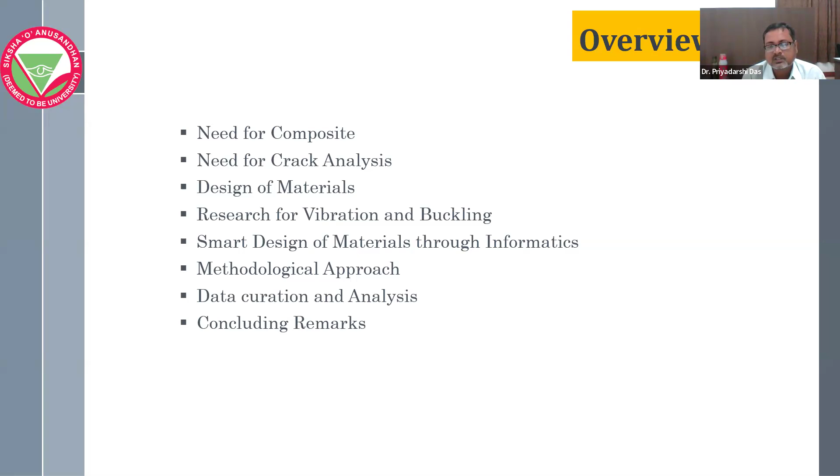So why do we need composite materials? Composite materials have been widely engaged in modern engineering due to their tailored structural properties, the inherent capability of combining two structures while maintaining their originality. That means two different materials are combined together to form a single material, where the individual materials do not lose their integrity. This enhances the performance of the material and also enhances its applicability, which significantly motivates the use of composites in widely engaged and applied engineering fields.

So what is the need for composite? It has improved tailored properties of high strength and stiffness, which essentially increases the stiffness-to-weight ratio and strength-to-weight ratio, reducing the weight of the structure, making it a lightweight structure without compromising its performance. That's why it is weight sensitive and cost effective, due to high strength-to-weight ratio.

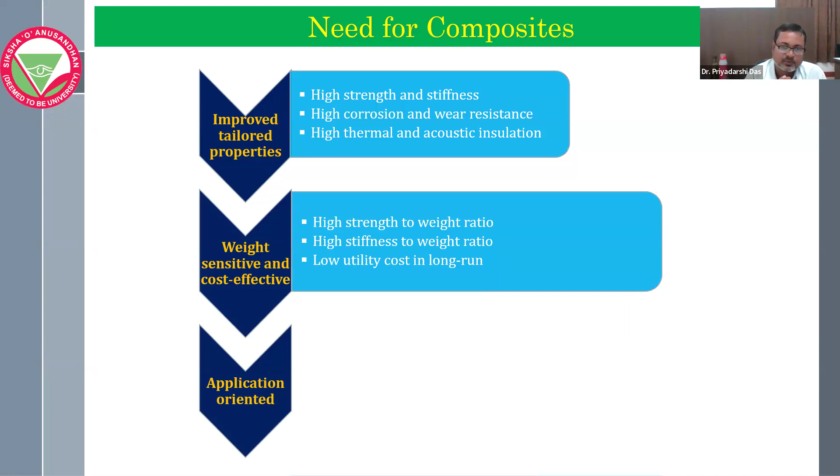It has low utility cost in the long run, and since it has these engineering advantages, it is used in different engineering fields ranging from aerospace to civil to mechanical to marine, even in sports goods. These are some engineering applications for composite materials.

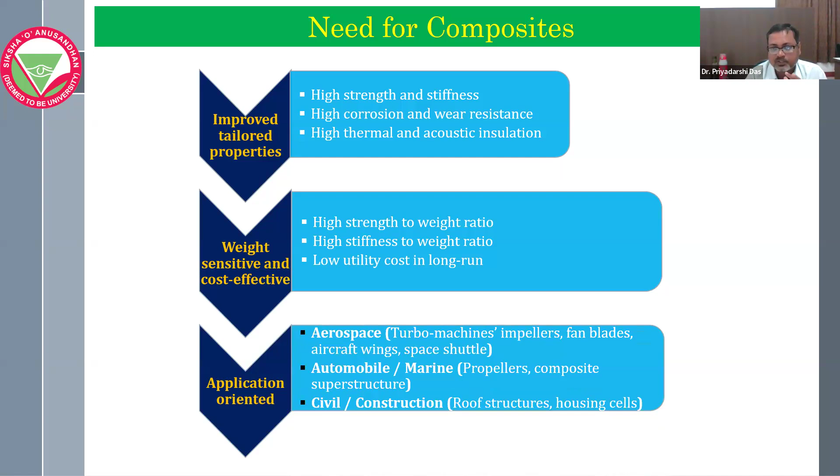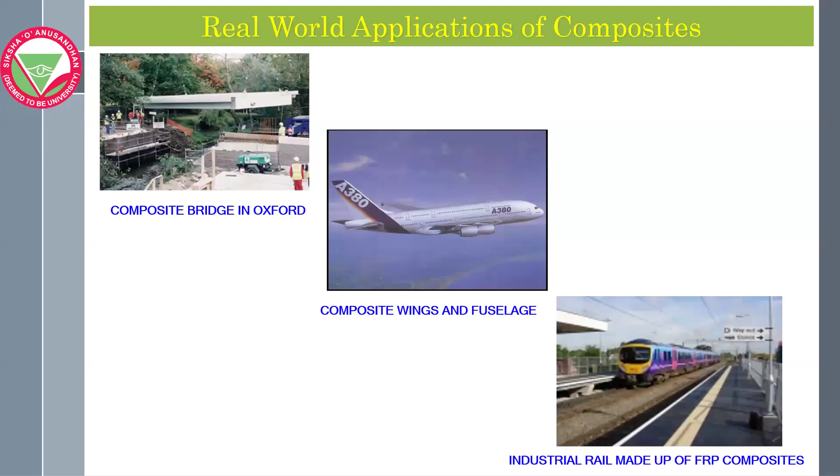Now the real world application of the composites. So these are some examples: a composite bridge in Oxford, composite wings and fuselage. It is well known that aeroplanes and aircrafts are being made with composites, and this is the industrial rail made of composites. These are some primarily focused composite materials in real world applications.

Now, we are going to analyze the mechanism of the composite. The laminated composite is engineered by stacking laminas or plies, each oriented in a specific direction. This imparts direction-dependent stiffness and strength. For the micro mechanics, each lamina is placed in a certain direction, and in that direction we can easily calculate the stiffness and strength.

Essentially, for the laminate, it has two phases: the matrix phase and fiber phase. The fiber phase carries the load, whereas the matrix phase transfers the stresses between the fibers so that it protects them from environmental loading.

This mechanism is clearly explained by Kollar et al. in their research paper, where I have taken this picture.

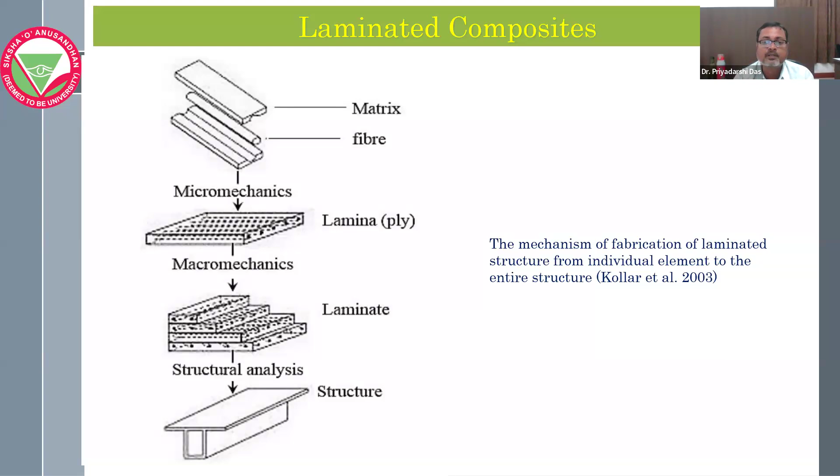The preparation and fabrication of this laminate needs certain temperature and pressure so that the bond between the laminates should be uniform. It is very essential to maintain that uniformity to maximize or get the optimal performance of the composite.

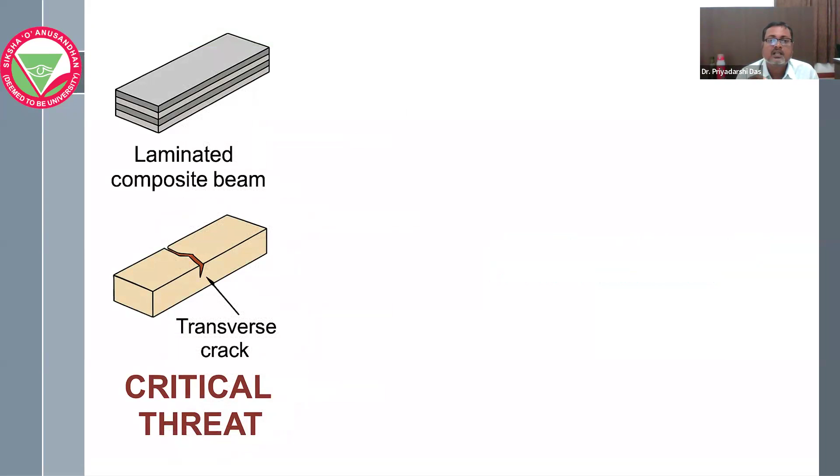If a structure is continuously used or widely engaged in engineering fields, it has the tendency to form cracks or disintegrations. When disintegration forms inside the structure, it leads to catastrophic failure. On wide engagement, it combinedly attracts vibration and loading. If vibration, loading, and buckling happen at the same time, both intra-ply failure and inter-ply failure will occur, damaging the structure quickly. So with vibration and buckling, catastrophic failure will occur sooner rather than later.

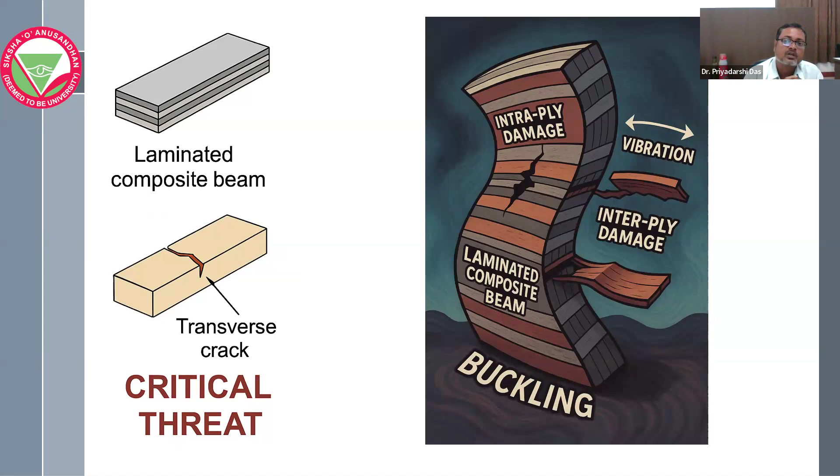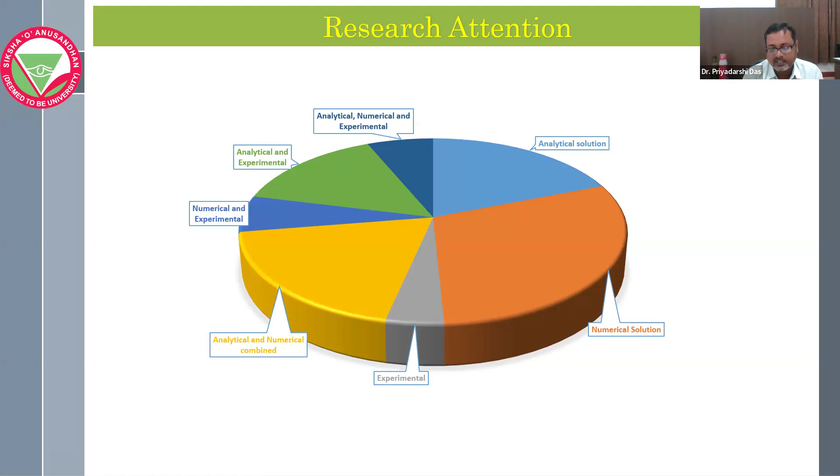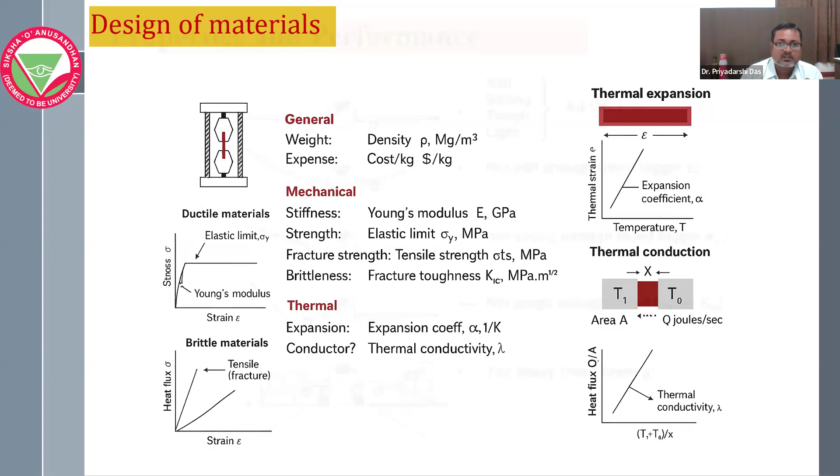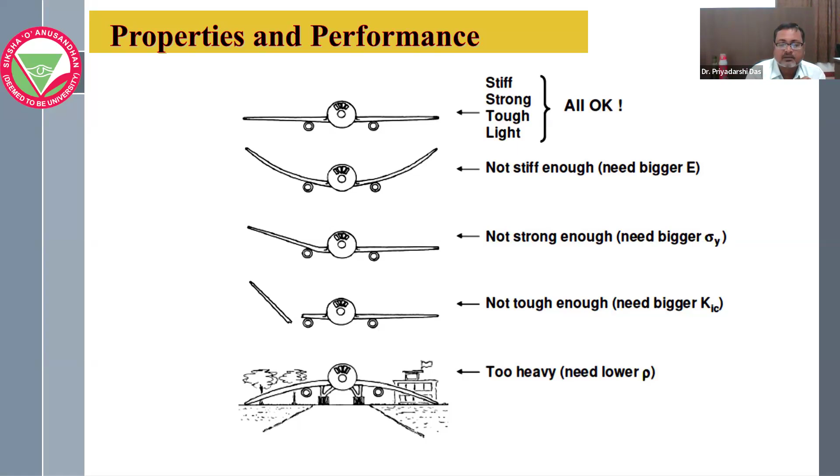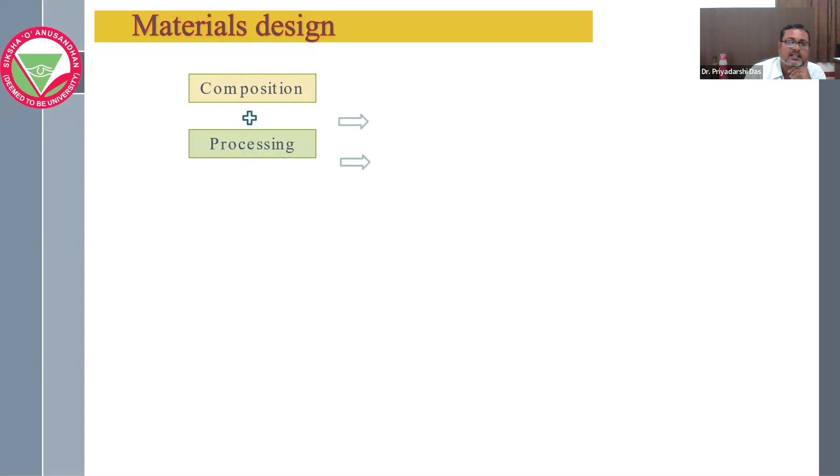So again, if you are going for material design, that composition and processing will determine the material's microstructure, which in turn governs the property and performance of the structure.

But the conflicting thing is that during material design, a designer or engineer always encounters two things: conflicting properties and conflicting requirements. What is conflicting properties? This occurs when improving one parameter worsens another. For example, increasing the strength may decrease the ductility, or increasing the stiffness may decrease the toughness. That is the conflicting property.

What is conflicting requirement? This is when at the same time one material needs two unachievable things, or it demands two material properties that are quite difficult to achieve. That means if a material needs to be highly conductive, at the same time it should be highly resistive against heat. In such circumstances, it is quite difficult to choose a material to use as a structural element.

That's why material design plays an important character, where between two distinctive properties - thermal insulation versus thermal conduction, or stiffness versus strength - it can be compared so that material can be used as a structural member in different applied engineering fields.

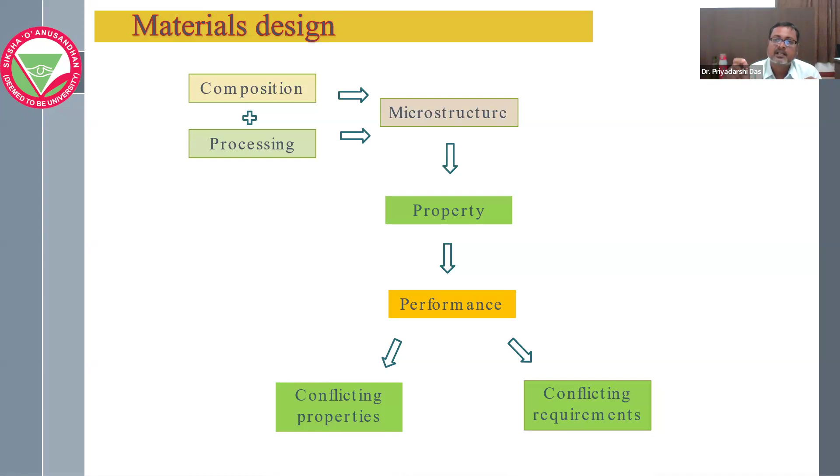All those things can be quite achievable through composite materials, because we are integrating two or more different materials into a single material without losing every single entity's properties.

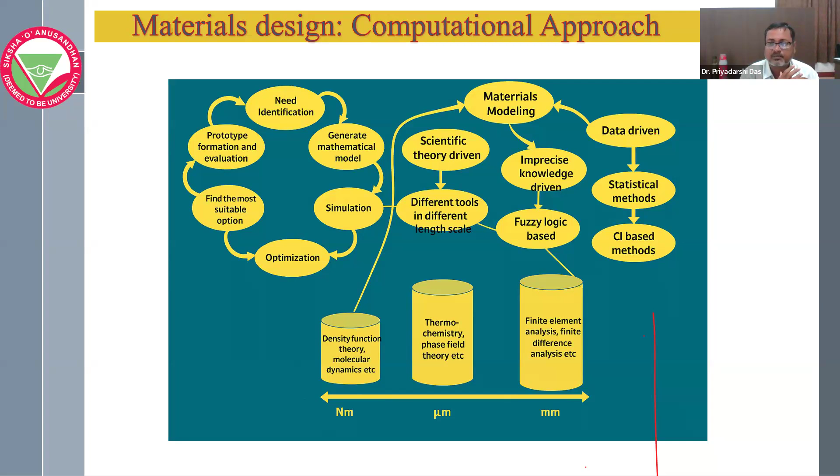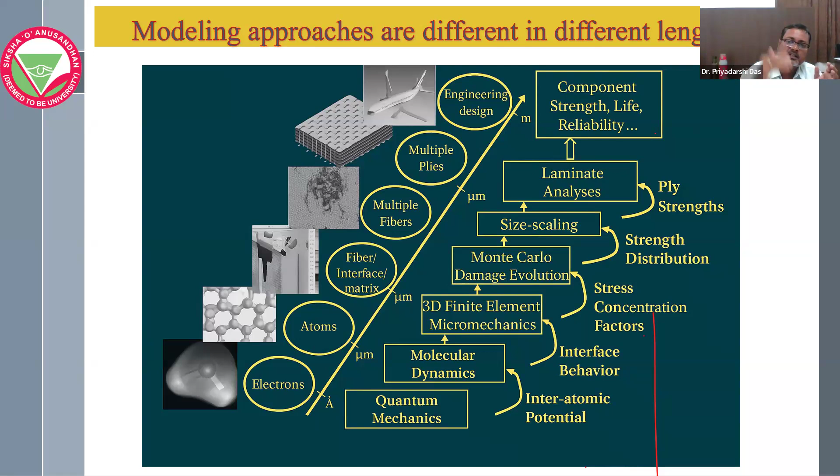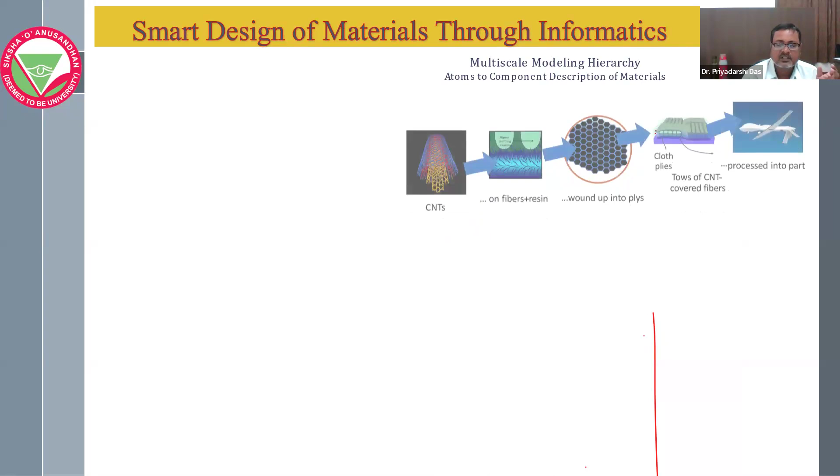The multi-scale modeling hierarchy shows the nanoscale to the material level. So here, if we take a case study, it's the same as carbon nanotubes that are integrated from nanoscale into fibers, plies, and finally the full composite structure that is used in aircraft tooling.

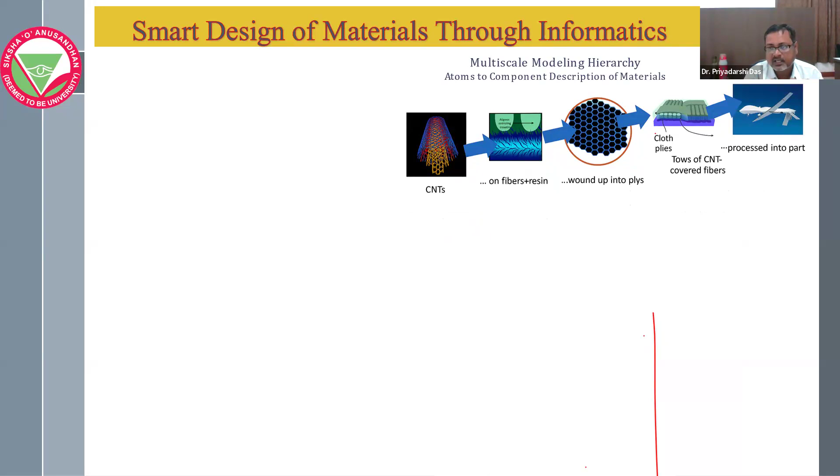So here the material informatics, where this is the material innovation infrastructure that integrates the computational tools, experimental tools, and digital data towards societal applications that integrate clean energy, human welfare, national security, and the next generation workforce.

That means it will enable the future generation, or the workforce, that will integrate these ideas or these processes to find the best suitable material for the structure or for the application.

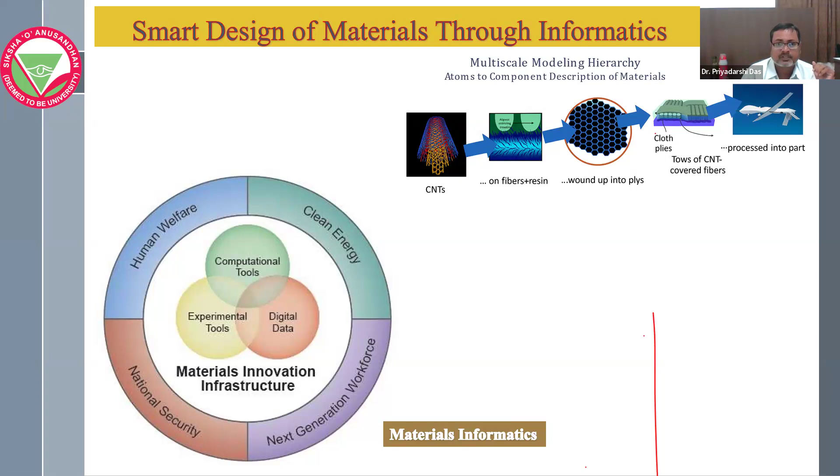Suppose we are going to find the frequency for the cantilever beam. It can be analyzed through the analytical method. But if that boundary condition is changed, or the boundary condition is different for different structures, it is very complicated to get the frequencies through the analytical solution.

Why are we adopting the numerical methods? Because numerical methods are approximate methods. If the approximation is quite close to reality, we get the accurate answer. And these things are validated against the experimental method.

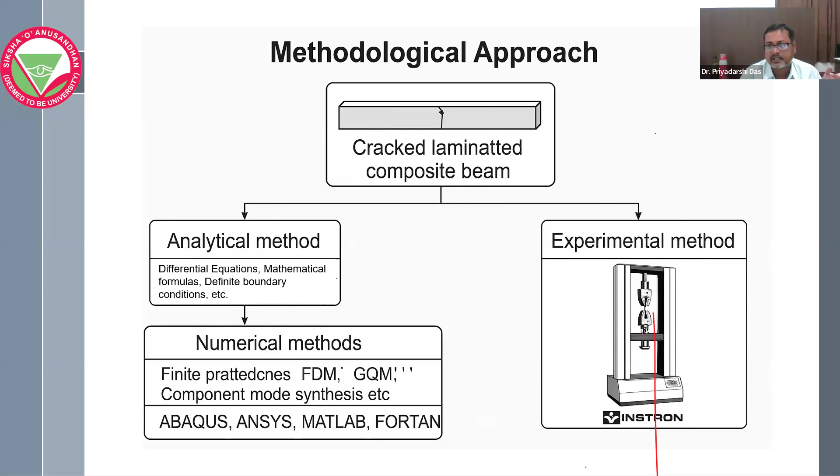For numerical methods, there is the finite difference method, GQM, that is the Gauss quadrature method, and component mode synthesis analysis. Abaqus, ANSYS, MATLAB, Fortran, those are the software packages. So we adopted the Abaqus finite element software. And the different types of cracks are open cracks, breathing cracks, edge cracks, central cracks.

The crack influence here is the crack that is formed inside the structure, that is an intra-ply failure. Due to that intra-ply failure, the stiffness will be reduced, and since the stiffness is reduced, the frequency will drop. That means frequency analysis is a non-destructive tool. If the structure is in a disintegrated position, its frequency will drop.

From that frequency drop, you can easily analyze that something went wrong with the structure, and somewhere the structure has been disintegrated, and we need to find out. So the frequency is passed through the structure. Where the frequency is obstructed, at that point you can look at the disintegration or that crack.

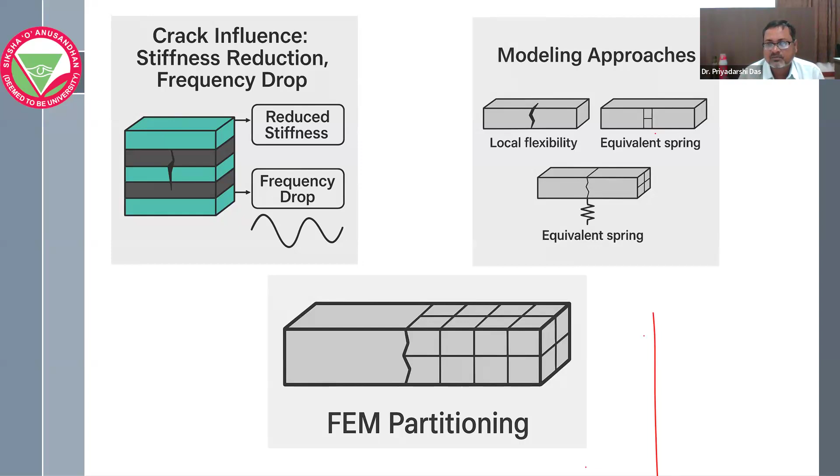So this can be drawn from the local modeling approaches, that is the local flexibility approach or FEM partitioning. FEM partitioning is quite effective compared to local flexibility. And here is the fracture mechanics concept: at the crack tip, the stress intensity factor is more. In fracture mechanics, the stress intensity factor quantifies the stress concentration at a crack tip. So how much stress is concentrated at that point?

So if the stress concentration is more, then the failure of the structure is imminent. That means the flexibility matrix will increase. If the flexibility matrix, or the local compliance, increases, that will reduce the stiffness of the structure. If the stiffness of the structure at that region is reduced, it will directly affect the structure and lead to the failure of the structure.

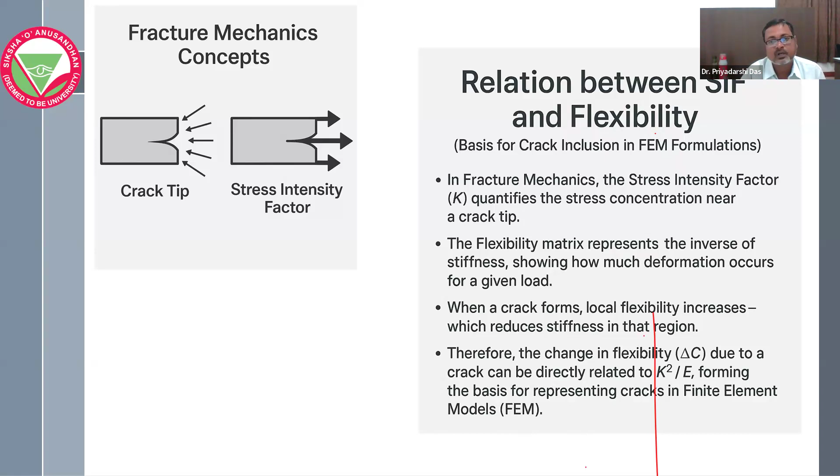So for this, we need the crack analysis. Here, the relationship between the stress intensity factor and flexibility has been formulated: delta C is the local compliance, and local compliance is nothing but the flexibility. U is the strain energy release rate. P is the applied load. From this, we can find the local flexibility as 2K squared by E P squared.

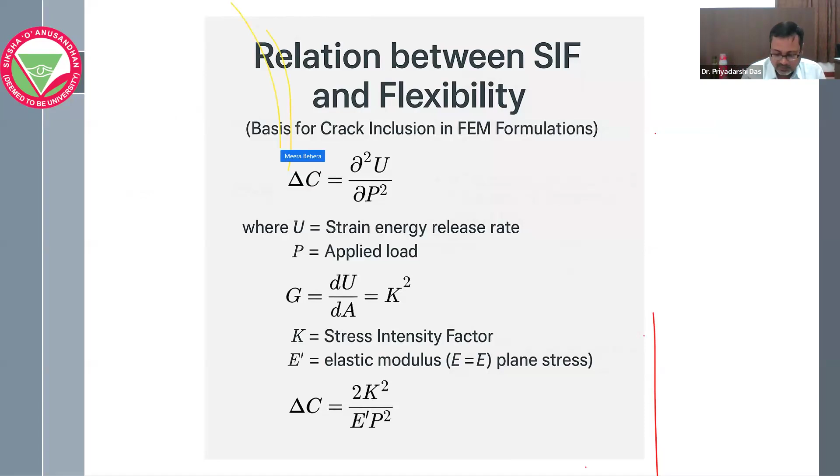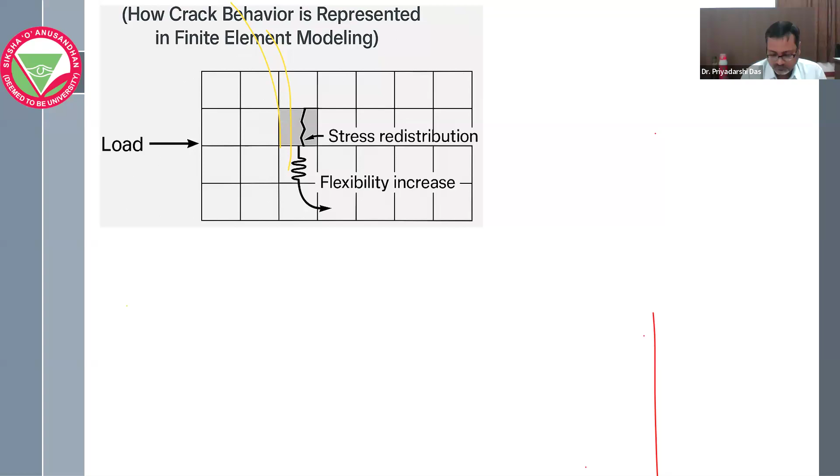So now the finite element modeling: where the crack has occurred, in that region, the stress redistribution curve will give the flexibility increase rate. From that flexibility increase, we get the reduced stiffness values. Mathematically, this can be presented as this. K is the global stiffness of the structure, that is the stiffness matrix of the intact structure minus the stiffness matrix of the crack, and the local flexibility can be computed through this.

So this formulation can be implemented through finite element modeling. If you are using the Abaqus or ANSYS finite element software, they have that library. You can form a model where assigning the cracks is quite easy. But when those models are formed through MATLAB or Fortran, you need to write the code. For that code, you need to incorporate these formulas into the crack region.

Because when a crack is formed inside the structure, it will divide the structure into two different parts. That means if L is the length of the beam, wherever the crack is formed, the beam is discretized into two parts, L1 and L2. At that point, you need to incorporate the crack stiffness value. From that crack stiffness, you can find the entire reduced stiffness of the structure. So this is quite essential for finite element modeling.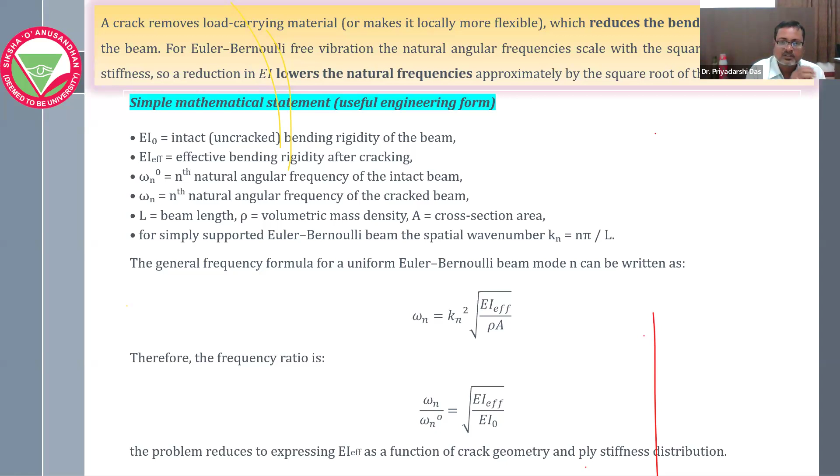So this is a typical laminated composite cracked beam where you can find the non-cracked layer and cracked layer. So basically we have presented here a 4-layer beam where the first layer is cracked and the two cracks are formed at L1 and L2, and where the crack depth is A. And all other usual notations describe the geometry and coordinates of the beam.

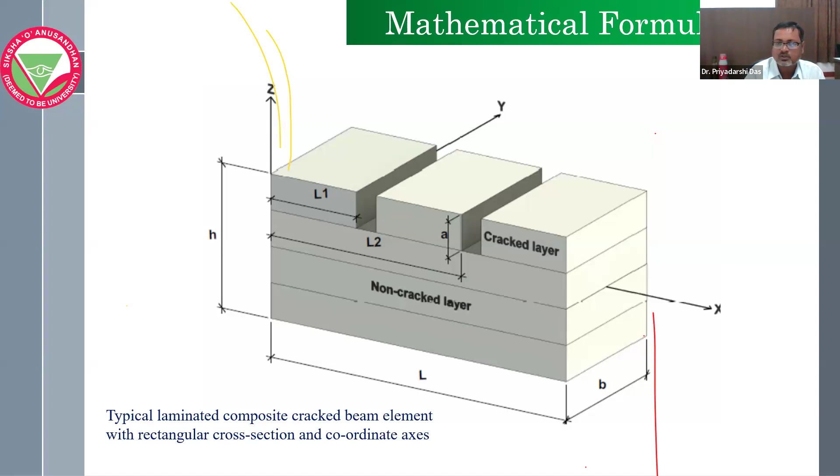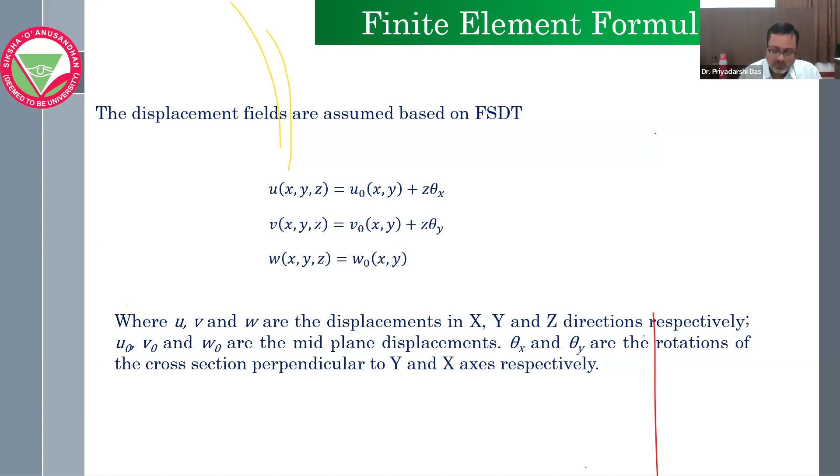So here is the displacement field based on the FSDT, that is first order shear deformation theory, and here typically 5 degrees of freedom are there: u0, v0, w0, theta x and theta y. That means translations in all 3 directions are taken, and the rotations are taken in theta x and theta y, so 5 degrees of freedom per node are taken, and the element stiffness matrix is governed through the Jacobian transformation: the element stiffness matrix, the element geometric stiffness matrix that is used in buckling, and the element mass matrix, that is consistent,

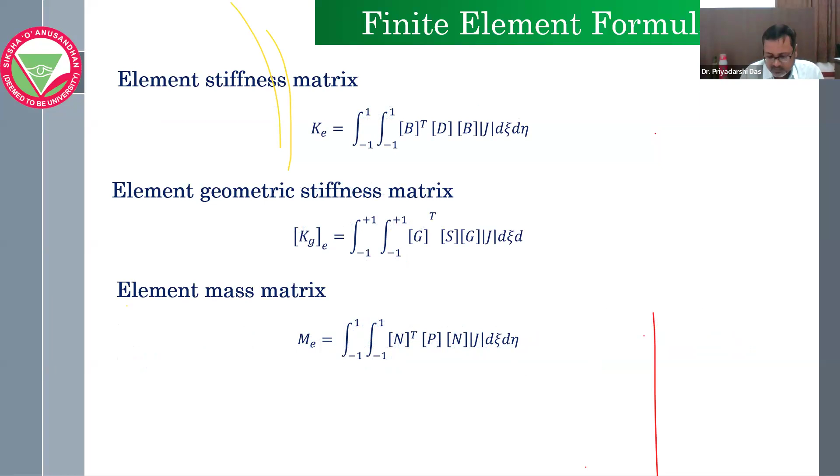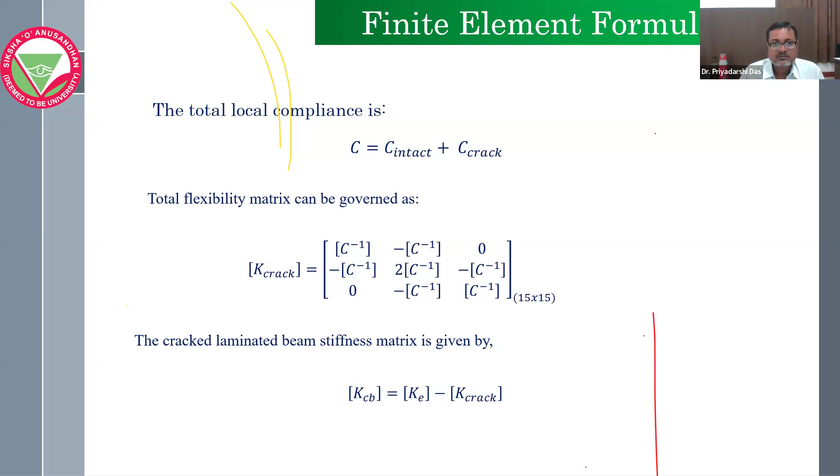and the total compliance, that is the flexibility, is the intact compliance of the intact beam plus the compliance of the cracked region, and the total flexibility matrix can be governed as a 15 by 15 matrix. So this 15 by 15 matrix can be modeled through Abaqus or ANSYS or using MATLAB finite element software. So the governing equations are K minus omega square M equal to 0, and Ke minus lambda Kg equal to 0, where omega square and lambda define the free vibration and buckling.

In my research, I have taken bidirectional fiber, that is quasi-isotropic. Quasi-isotropic means the material is composite, but it behaves like an isotropic one. So that means E is constant: E1, E2, E3 in all 3 directions are the same. Then G1, G2, G3 are all the same. So in our research, E and G are both the same. So if E and G are the same, it behaves like an isotropic material, but actually the material is composite. This is called quasi-isotropic material.

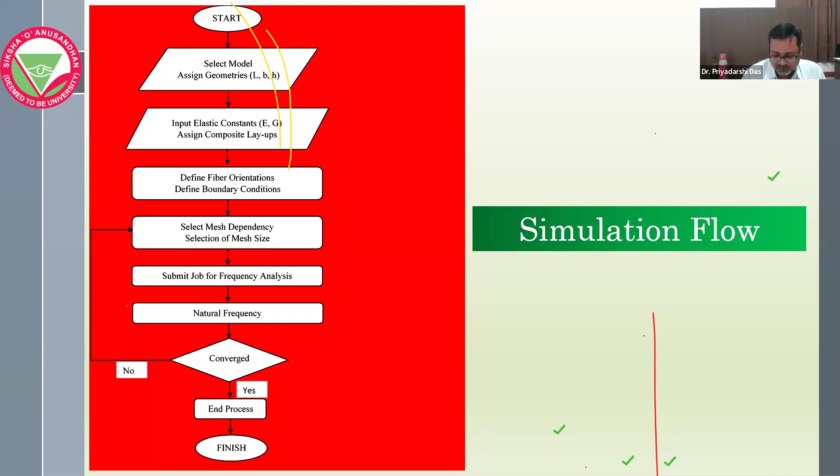For the vibration simulation, this is the way we have developed the beam in the Abaqus platform, where I have shown here 8-layer laminated beams. And for that 8-layer, it is 0-90 degree. It is horizontal 0 degree, or vertical 90 degree. It is a 0-90 ply.

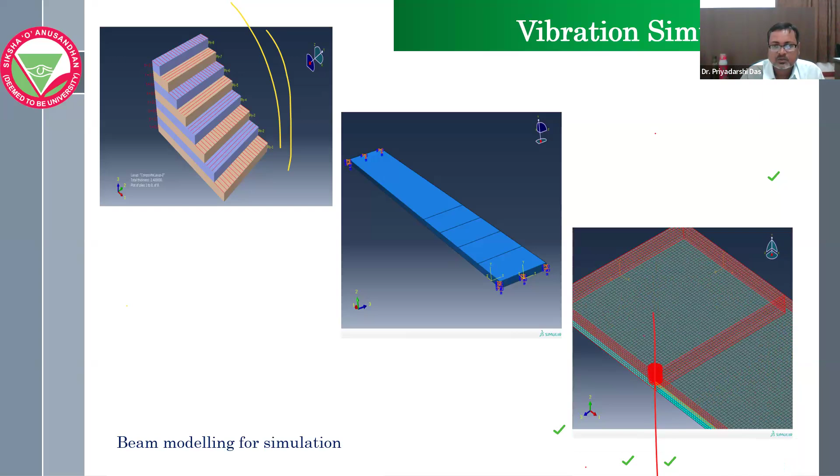Then here the cracks have been formed, assigned with the cracks. In Abaqus, there is a special case that we can provide the cracks at different regions. And here for that crack region, you get where the concentration is higher, through that mesh size, the mode shapes using Abaqus.

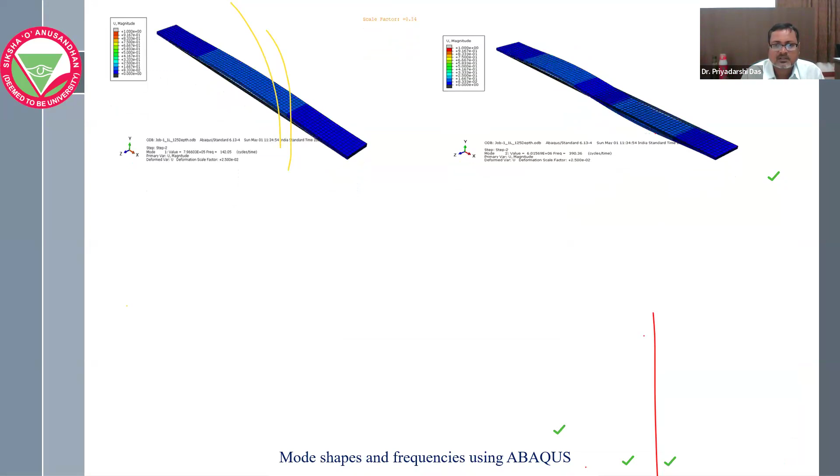So this is the first mode of vibration generated on the Abaqus platform. After generating the result, you can find this. That platform will facilitate to generate such kind of field, where the three mode shapes of the vibration can be easily identified and easily be realized.

This is the fourth mode vibration where it is more like a twisting thing. So mode 1, mode 2, mode 3, those are the bending vibration. At mode 4, it seems as though it is the twisting vibration.

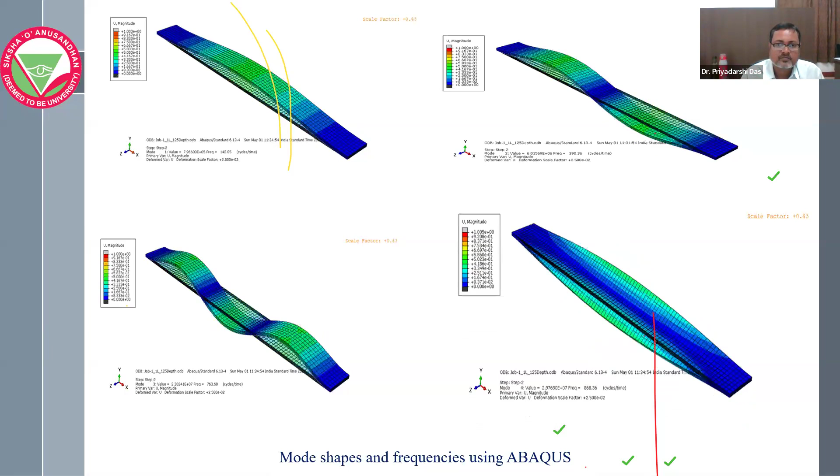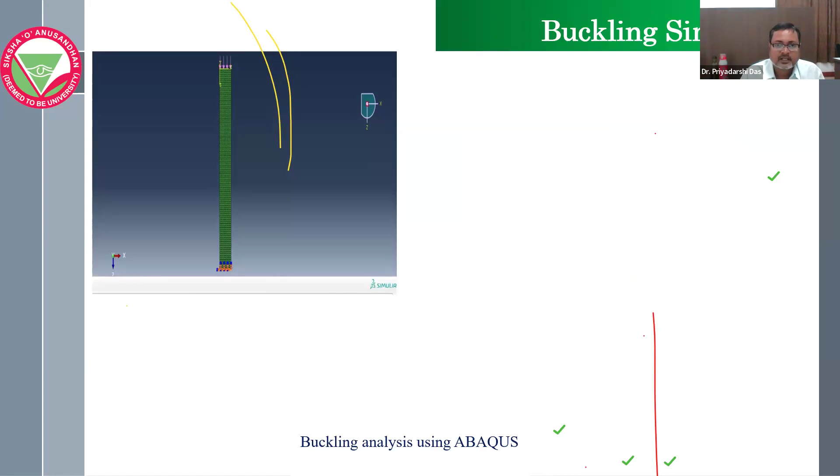So the buckling simulation. We have to place the beam as vertical. Then this is the mesh size. Also, we'll get the mode shapes for the buckling. This is mode 1, this is mode 2.

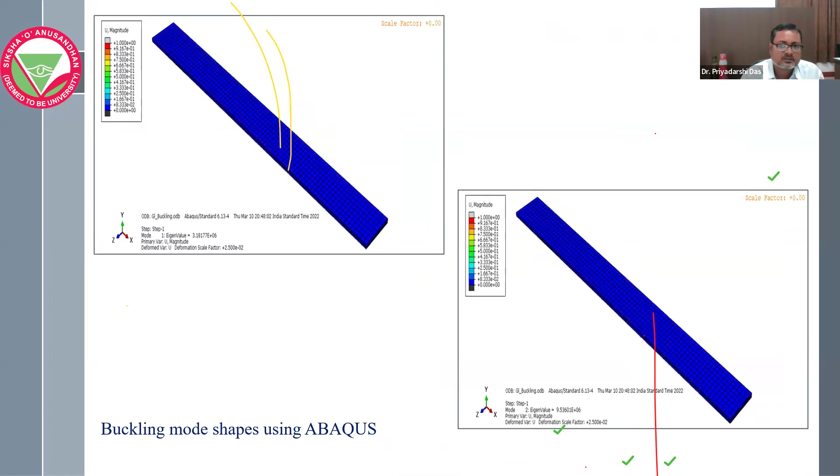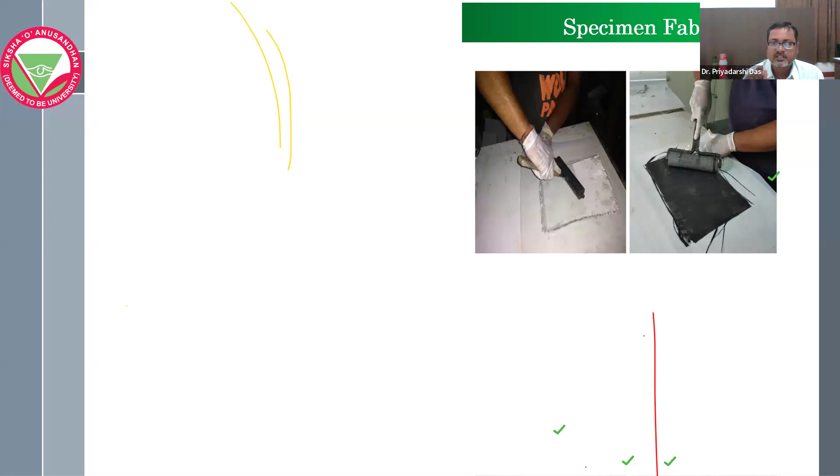Now the specimen fabrication, we have used two specimens for glass epoxy and carbon epoxy. So in these two figures, the specimen is fabricated like I said in the earlier slides, where the fibers are placed one after another, and in between, the matrix is there. The fiber is meant to carry the load, and the matrix distributes the stresses between the fibers to protect it from the external environmental loading.

And this is the diamond cutter, where after curing the plate, the beams have been extracted through this diamond cutter, with continuous pouring of water, to get the desired shape of the beam. Here, the beam size is 25 mm width, 250 mm length, and the thickness has been measured through the slide calipers. Here it is 2.6 mm.

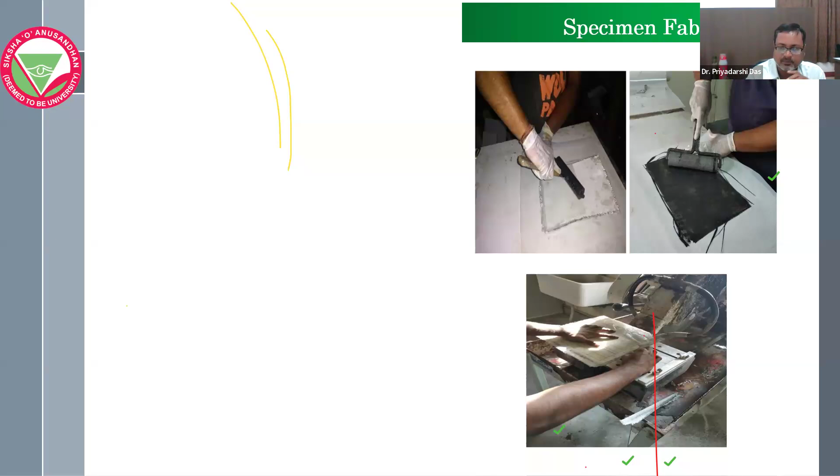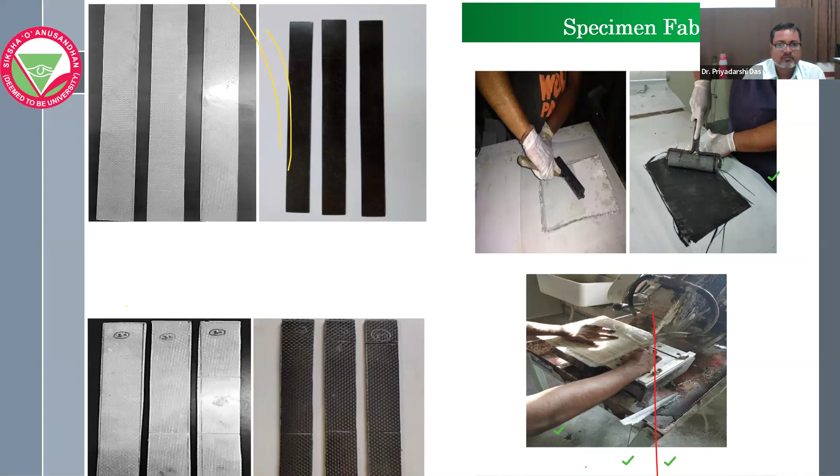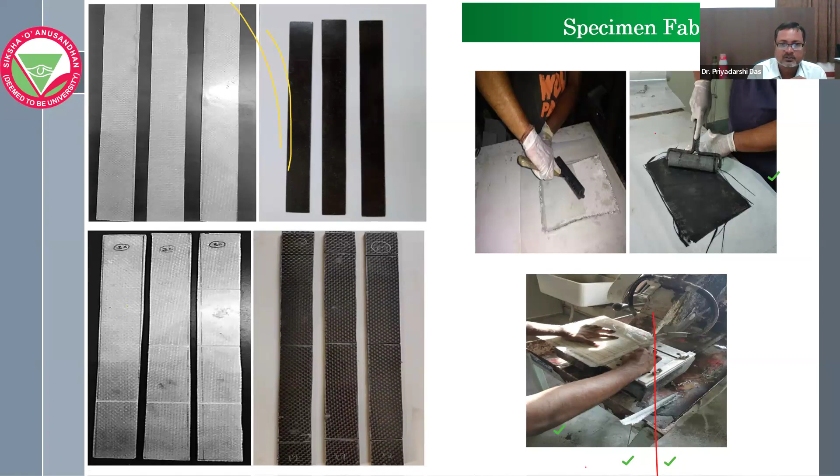These are the beams after extraction, after cutting from the diamond cutter. These are the beams in intact stage, and these are the beams in cracked stage. That means cracks are engineered there through a hacksaw as per the requirement. If it is an 8-layer beam, we can engineer the cracks up to 1 layer, 2 layer, 3 layer, 4 layer, and it must be done with great precision. Otherwise, your sample will be lost.

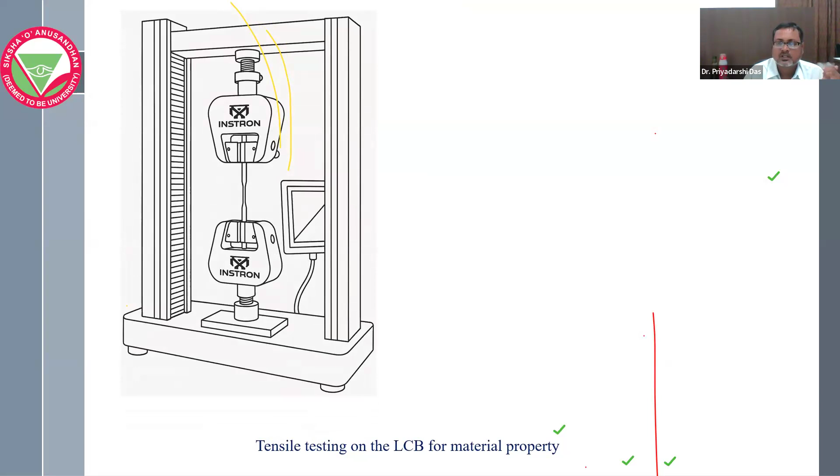After extracting the beam samples, it is placed on the instrument to calculate the material properties. That is E, G, and mu: Young's modulus, rigidity modulus, Poisson's ratio. Here is the schematic diagram for the instrument, and here the original instrument used to evaluate the material properties for the carbon epoxy beam.

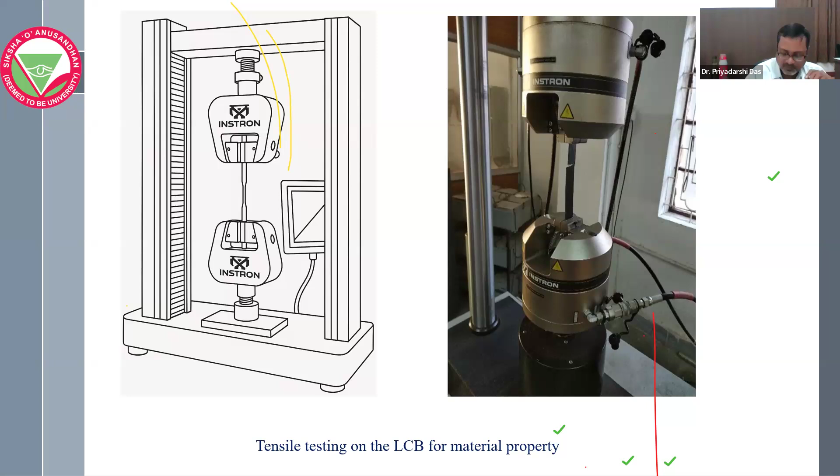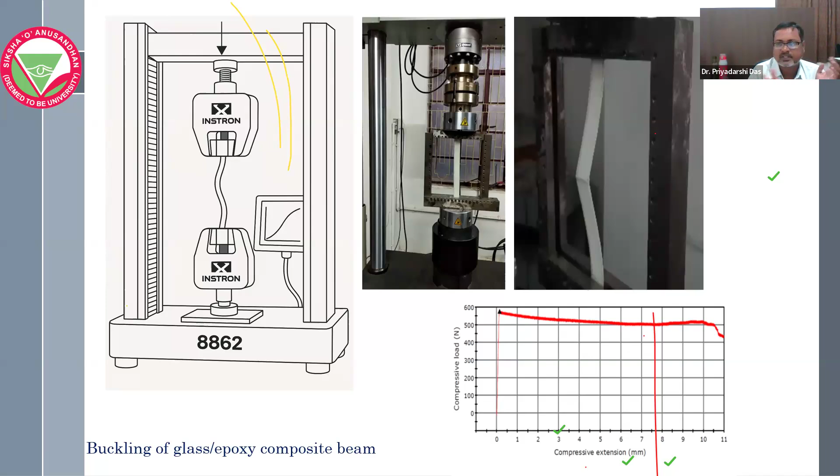The instrument name is Instron 8862. It's basically used for tensile testing and buckling testing. Here the glass epoxy beam is used, and the arrangement is for buckling. You can see the beam is buckled at the middle portion, it breaks, and subsequently a graph is generated showing the compressive extension against the compressive load. So we can find the compressive load for the glass epoxy, carbon epoxy or graphite epoxy beam.

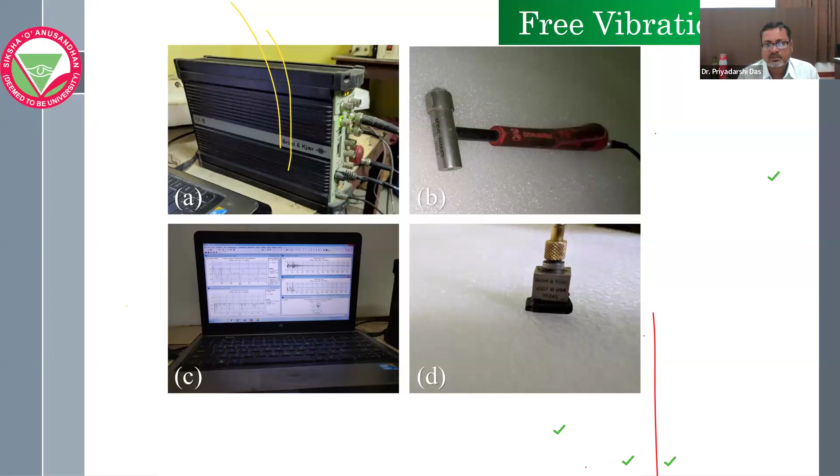So for that display, you need another software, the LabVIEW software. On that LabVIEW software, all the graphs are reflected based on the different boundary conditions. And there is an arrangement also to fix the beams as per their boundary condition, whether it is clamp free, clamped, or simply supported. All the arrangements have been done, and on that arrangement we perform the vibration analysis, which is effectively captured through LabVIEW. This is the complete setup.

So when the vibration results are obtained, now through Abaqus, we need the convergence study. Convergence study is essential to capture its physical form towards the vibration. So first, a 500 elements division was taken. In our Abaqus model, we have taken the material parameters and material properties as taken by Talekar and Kotambkar in 2020. Whatever their material properties, boundary conditions, and ply orientations, we have taken exactly the same parameters and applied them on our model.

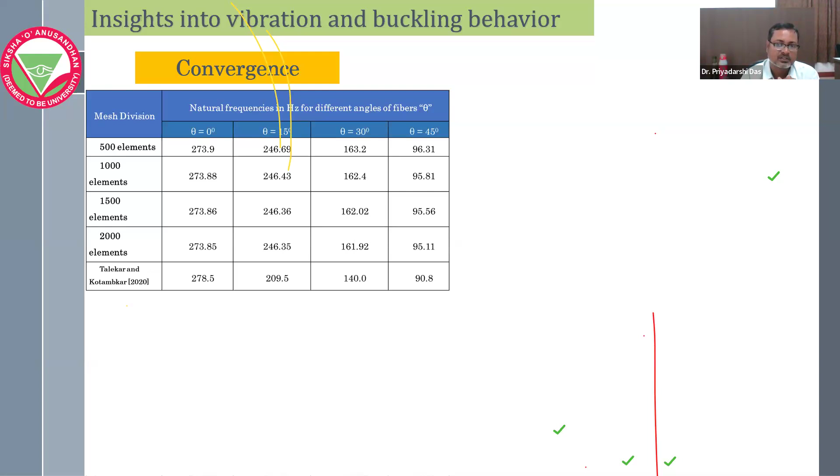That means the model we have developed using Abaqus is robust, providing the same result independent of the materials. So now we can take our material, glass epoxy or carbon epoxy, to produce new results, because this simulation model is validated against two well-established literatures. And you can check the years, Talekar and Kotambkar in 2020, Maiti and Sinha in 1994. Across the years, this model doesn't give any dissatisfactory results.

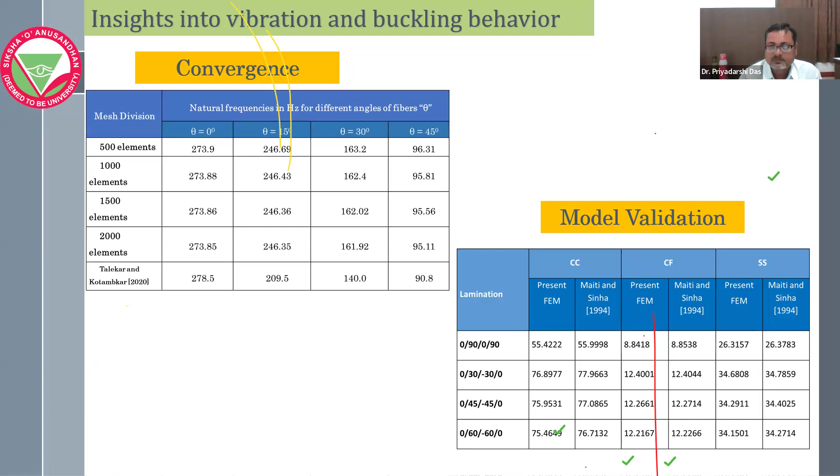So we have calculated the effect of fiber orientation. The fundamental frequency for the 0 degree fiber orientation is obviously more than for the other orientations, that is 15, 30, and 45 degrees. That means we need the 0 degree fiber orientation, because it gives the maximum frequency compared to the other fiber orientations.

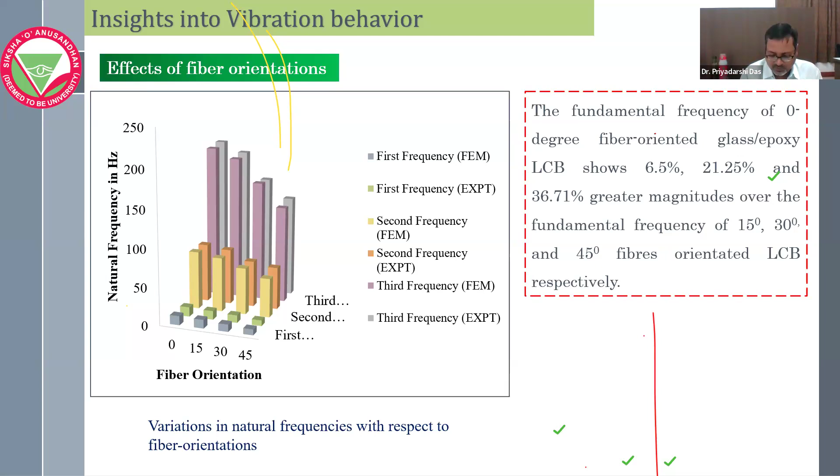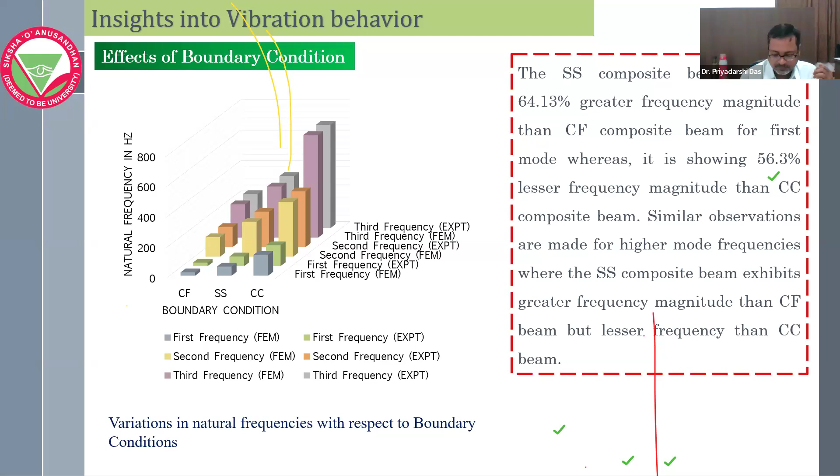But we have chosen the 8-layer lamination for our research, since we are doing it numerically as well as experimentally for ambient environment conditions. 8-layer sits well with us. That's why we have taken the 8-layer beam. A 12-layer beam or 16-layer beam can be taken. A 20-layer beam also can be taken, but the curing process or the fabrication process itself will take much time.

For the 8-layer beam, maintaining the pressure and temperature was a difficult task. If you are going for the 12-layer beam, it will be more difficult to achieve uniformity between the two layers. Like I said earlier, if the epoxy, that is the matrix, is lost between two layers, that will essentially transfer the stresses between two layers. But the stress distribution should be uniform. If this is not uniform, then obviously cracks will be formed there.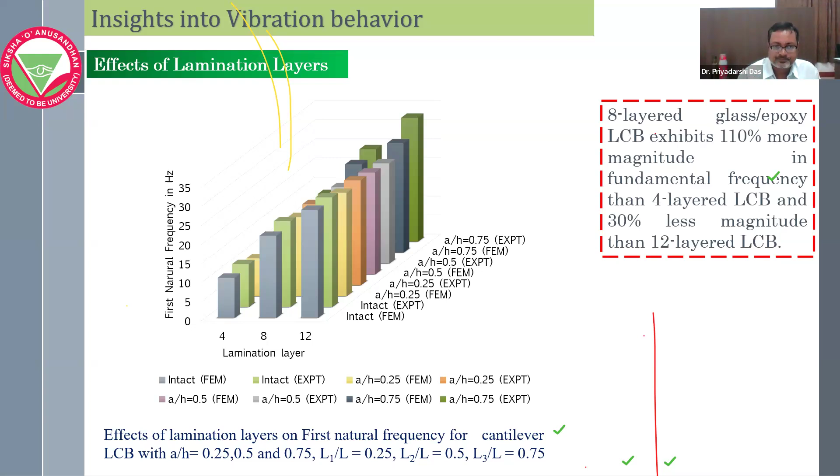Now this is the effect of the position of the crack. The position of the crack, that means L1, L2, L3, we have taken for the intact beam at 0.2 L, 0.4 L, 0.6 L, and 0.8 L. Now, if I take the single crack position, we can find at which position the crack exhibits the lower frequency or maximum drop from the intact beam.

So we can realize from the figure that at 0.1 L, at that position, at the crack depth, it will exhibit the maximum drop. Now if we go for the multiple crack analysis, consider two cracks. For a single crack, the crack exhibits the maximum drop at 0.1 L. For two cracks, 0.1 L is kept constant because that is the critical position, and the second crack is varied from 0.3 L to 0.9 L.

Now, for that analysis, at what combination of two crack positions will the beam exhibit the greater reduction in frequencies? Here you can find that the combination of 0.1 L and 0.3 L experiences the greater reduction of the frequency. For the third crack, the cracks need to be fixed at 0.1 L and 0.3 L, and the third crack must be varied from 0.4 L to 0.9 L. This is a sequential approach to describe the crack behavior inside the laminated structure.

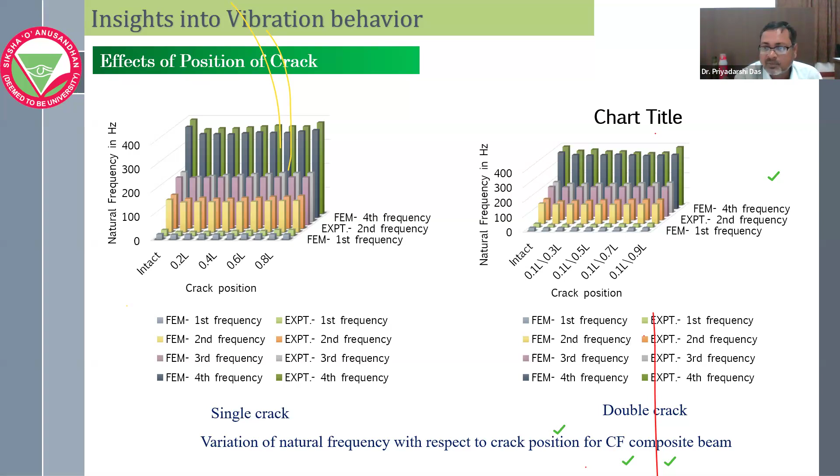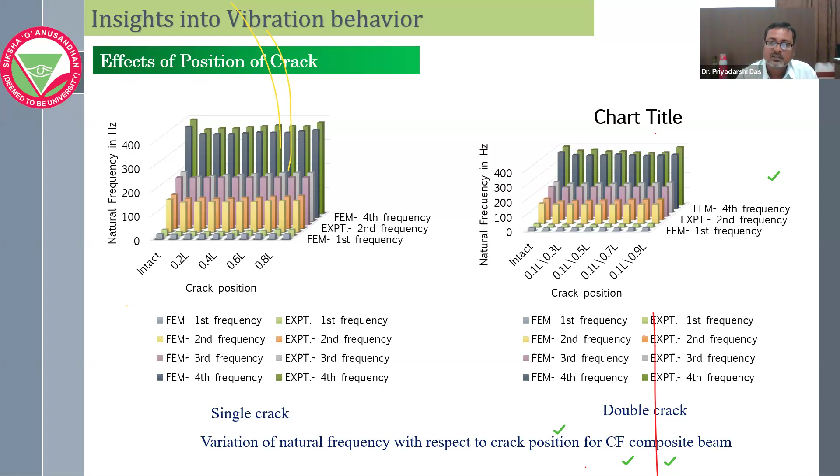In this way, we can easily identify where the disintegration happens and how the structural behavior is affected through the initiation of the crack. The same thing we adopted for the effect of the crack depth. For a single crack, the crack depth ranges from 0, that means intact, to 0.125, 0.25, 0.375, 0.5, and 0.625. So we can find at what crack depth the intensity is higher. Keeping that position the same, the other crack depths are varied. At position 0.1 L, the severity of crack is high, so for two crack analysis, 0.1 L is constant and 0.2 L to 0.9 L is varied.

For crack depth also, we are adopting the same method, be it the frequency analysis or the buckling analysis. This sequential approach enables us to identify the crack severity and how much crack severity the structure can tolerate. That means at what depth a cracked element can still be used as a structural element, and at what depth the crack severity is so much that the structure needs to be replaced or addressed. So this sequential approach enables the designer to effectively analyze the composite structure.

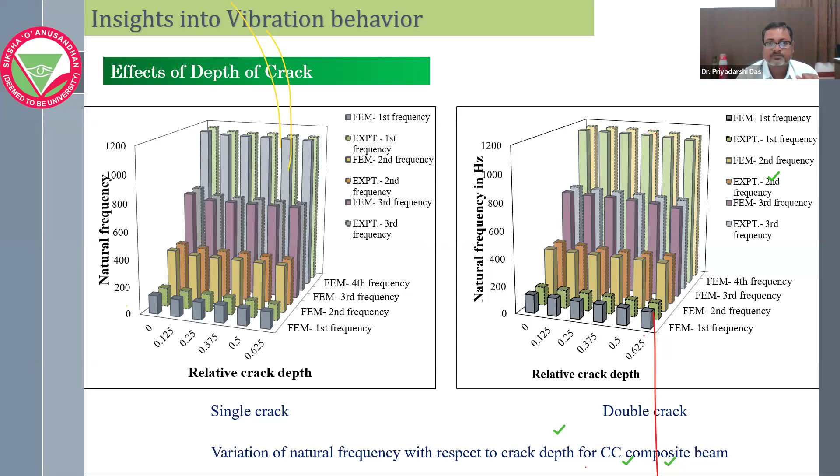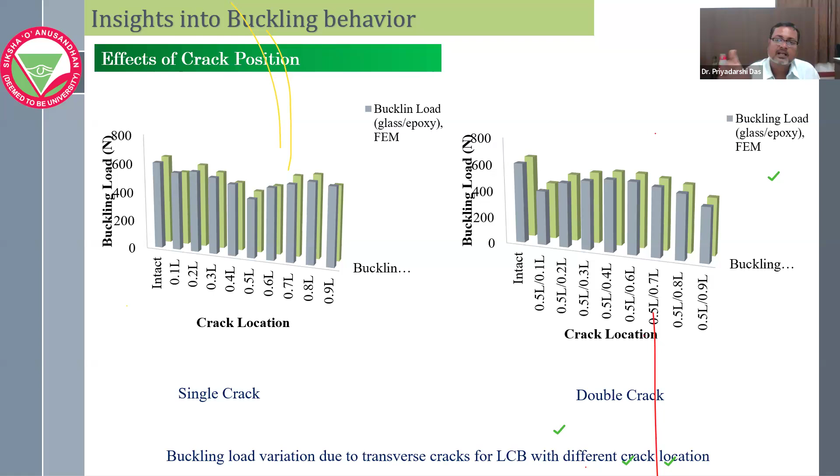The effect of the boundary conditions for the buckling load has been performed in the same way, and the effect of the crack position too. For the vibration analysis and buckling analysis, both are the same. Here, since it is buckling, we find the maximum reduction happens at 0.5 L, so for the second crack, 0.5 L is constant. For vibration analysis of the cantilever beam, 0.1 L is the critical position, while for buckling, 0.5 L is the critical position. For two cracks, 0.5 L and 0.1 L are critical. Similarly for 3 or 4 cracks there is a pattern, and through that pattern we can analyze the number of cracks in an element.

So this is the effect of crack depth. It has been calculated with the same pattern: effect of crack depth for the single crack, and effect of crack depth for the double crack.

So all these things I have presented for glass epoxy, and also we are having the values for the carbon epoxy.

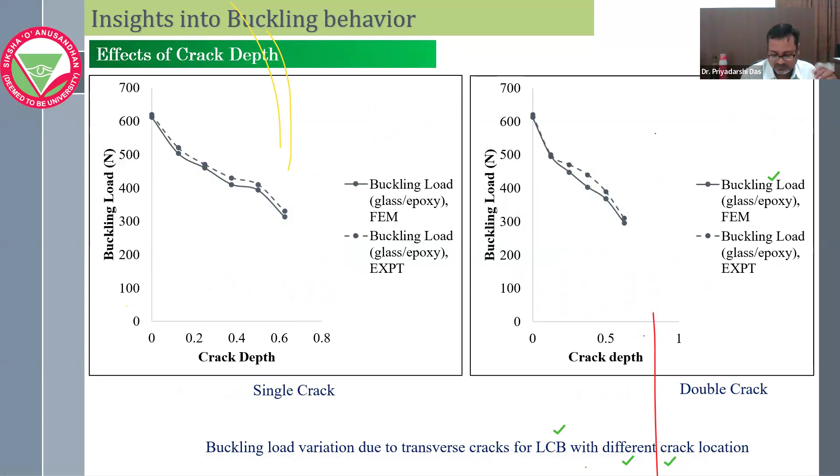These are the concluding remarks: the computational modeling framework captures the dynamic and static stability behavior of cracked laminated composite beams, offering accurate insights into both vibration characteristics and buckling performance or static stability performance.

Through this research, we can clearly reveal the crack severity and crack behavior with respect to the laminate configuration and the mode shapes, and critical buckling loads can both be realized.

The main thing is that in Abaqus, it is independent of the global degrees of freedom. In the beginning, I showed you 5 degrees of freedom, which you can model in MATLAB, Fortran, or ANSYS. But in Abaqus, the model is independent of the global degrees of freedom, meaning if you take 10 or 15 degrees of freedom, it is independent of that. Irrespective of the global degree of freedom, it will produce the results.

Definitely, if the number of degrees of freedom increases, accuracy will increase. But Abaqus is such a software that it is independent of the degrees of freedom yet still provides accurate results. If you compare the Abaqus results with ANSYS and MATLAB results, there is not much difference between Abaqus and MATLAB—within 5 to 6% deviation.

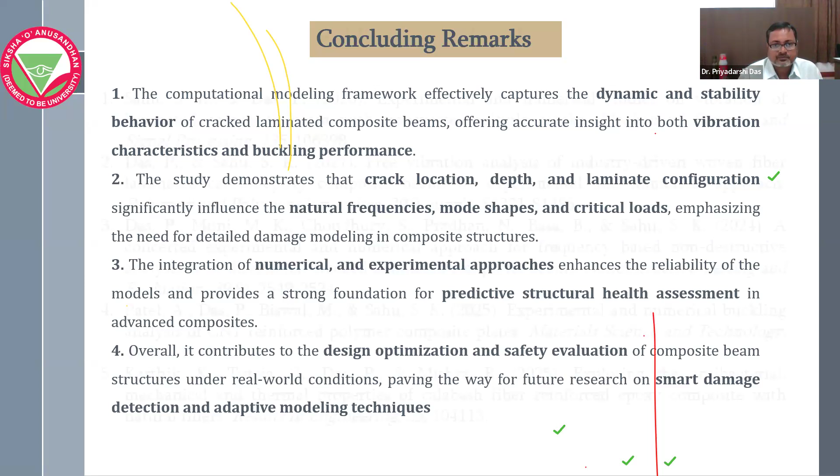These are some publications I have published, and I have taken all those materials from them. You can follow this literature and these publications for better understanding.

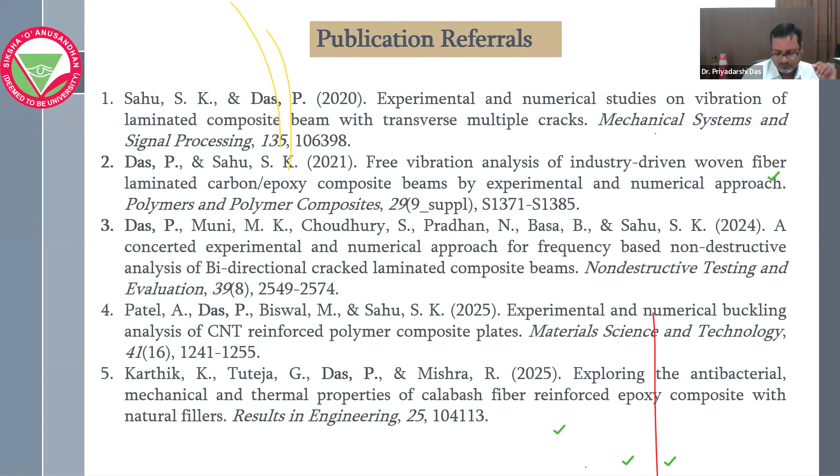Thank you. Any questions?

Good evening, sir. A question actually. Hello, am I audible, sir? Actually, two sounds are there, so it is quite difficult for me to understand. Hello. Suraj sir? Yes, sir. Am I audible, sir? Yes, you are audible. Okay, sir. Very nice work, sir. Many congratulations on this work actually. So I have questions actually. Can I?

Sir, actually the laminate composite we have taken—first of all, the E value you told is isotropic throughout, in all directions, isn't it sir? The composite, the experimental composite beam you have taken in the numerical modeling, you have taken E value same for all 3 directions, isn't it sir? Am I right? Yes.

And sir, the different angles you have taken in the numerical modeling, 0 degree, 5 degree, 30 degree, that is for the computational analysis. Yes, sir, computational modeling we have taken. Let me show you.

That means whatever value you get for 0 degree is the same value you get for 90 degree. Whatever value you get for 30 degree is the same value you get for 60 degree. Yes, sir, that's actually what I want to know, whether for 0 degree, 90 degree it's okay. When you compare 0 degree and 30 degree, then the E value will change, I think, for both orthogonal directions. E value definitely changes, obviously. In orthogonal direction, E value will change. In every direction, E value will change.